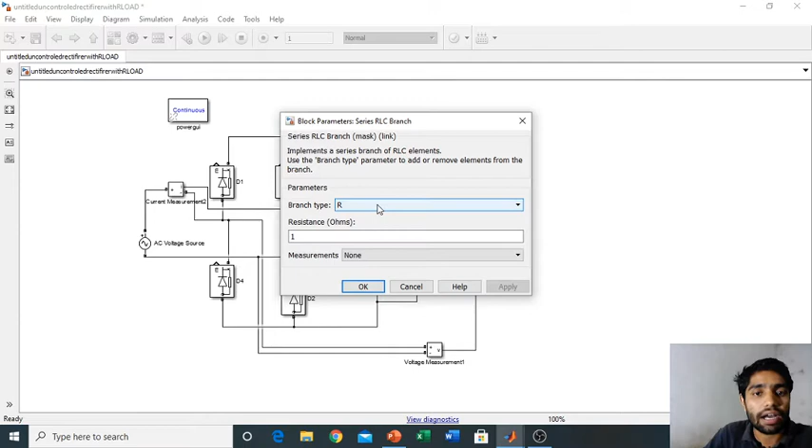Now I am changing the load. If I use the RL, what happens? When we use the inductance, purely inductance, basically the extinction angle will increase. The output voltage goes negative because the current does not become zero suddenly. Okay, so let's simulate this. Run it.

Go to the scope. Yeah. This is the output voltage that is going negative. We are not changing the output current because output current is continuously increasing, and this is the IS. I am interested in the domain of the output voltage.

If I use RL load, so extinction angle, sorry I made some mistake, the extinction angle will be 2 pi. The range of the extinction angle becomes pi to 2 pi. Okay.

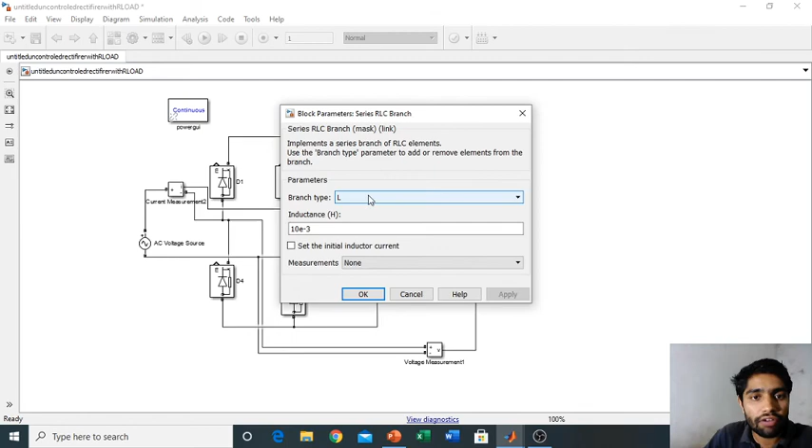Okay, now if I apply the RL load, you can see what happens with the extinction angle. Sorry, I have to change the value, that equals 1. Run it. Check the scope. Yeah, extinction angle is somewhat increased.

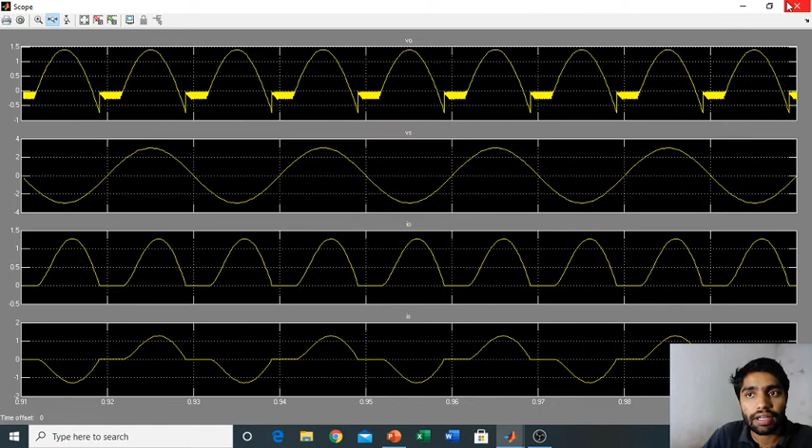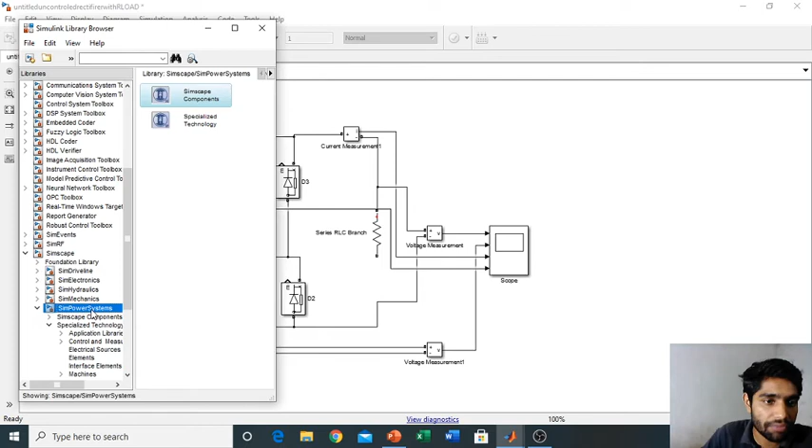Okay, now I am going to the RE load and I am replacing the R. I am removing this and putting a DC voltage source. So same way, this is my Simscape, I click on it, then I go to SimPowerSystems, Specialized Technology, and Electrical Sources, and this is the DC voltage source. I click and add it.

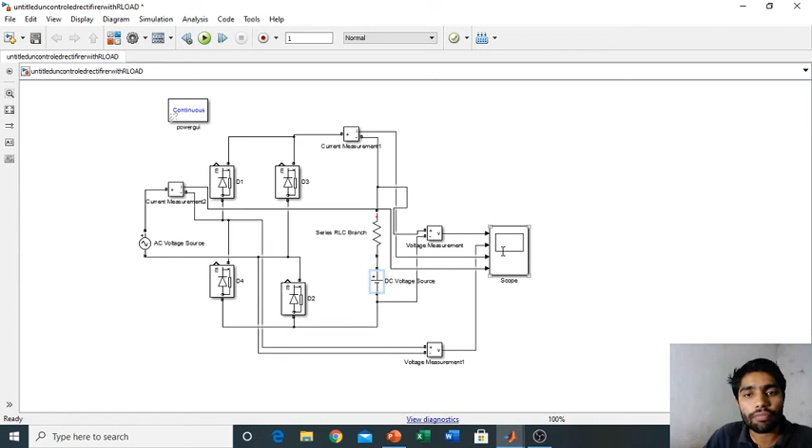This is my DC. Here this becomes the RE load, and the value I am putting is 1 volt, and I have to run this simulation. You can see the waveform right now. You are always getting 1 voltage.

Why are you getting 1 voltage? In the previous cases the output voltage started from 0. Listen to one thing. When D1 and D2 are conducting, the conduction starts when the source voltage becomes greater than this voltage. That means it is 1.4. This is 3 volts, but 0.8 and 0.8 is the drop across both diodes.

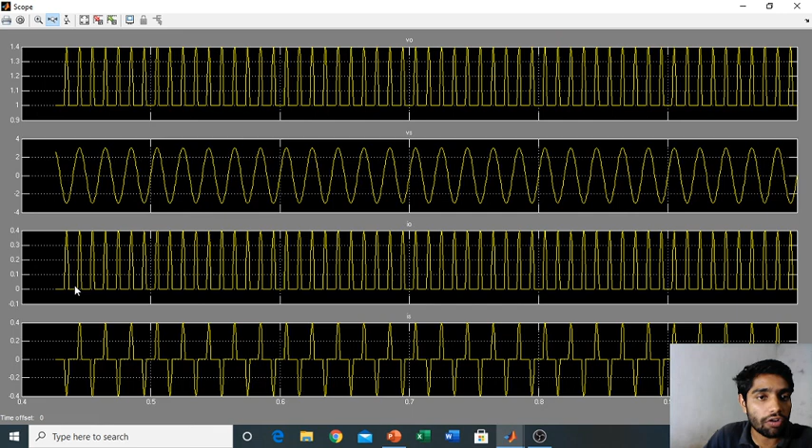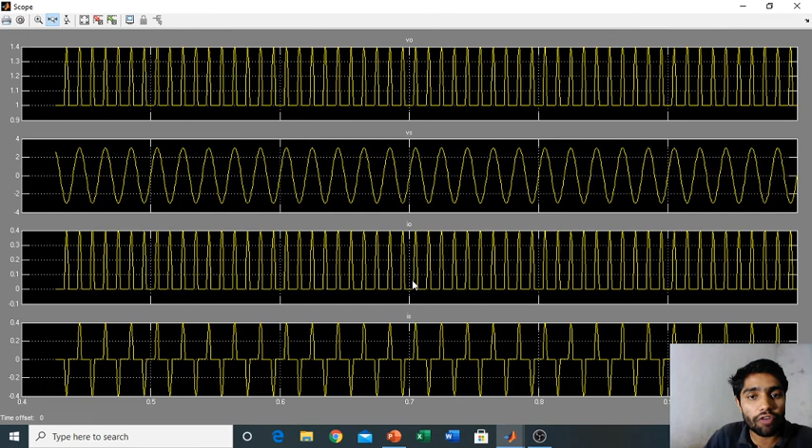From this point to this point, if you apply KVL, you find VDC, and VDC applied is 1 volt. That's why we are always obtaining 1 voltage as output. This is the source current waveform and this is the output current waveform. So I hope you got a clear idea about the waveforms of the full wave rectifier, that is uncontrolled.

If we use all SCRs then it becomes controlled, because in the SCR, by triggering using the gate signals, we can control the turn on of the SCR.